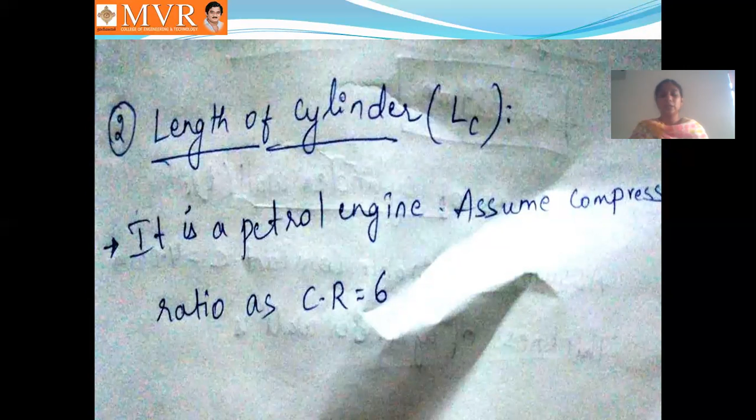Okay, next, second one, what should we find out? We should find out the length of cylinder. In the question they had given the petrol engine. Petrol engine means assume compression ratio as 6. Compression ratio is equal to swept volume plus clearance volume by clearance volume.

Swept volume we can take as the stroke, clearance volume as top clearance. Now compression ratio is equal to, we can take it as L plus L1 by L1. Substitute all the values, then L1 is equal to 32.6 mm. Okay, next, length of cylinder.

Length of cylinder Lc is equal to stroke plus top clearance plus piston length, that is L plus L1 plus Lp. Lp is nothing but piston length, we can take it as 1.25 into D. So 163 plus 32.6 plus 1.25 into 130. Substitute all the values, you will get the length of the cylinder.

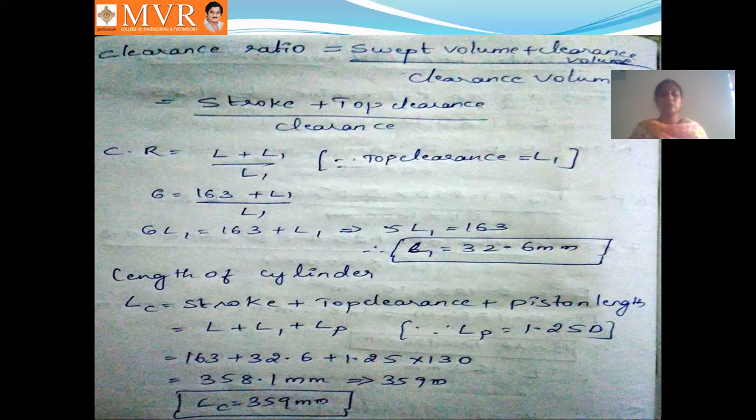Okay, next, thickness of cylinder wall, t. Assume constant C is equal to 4 mm. How will we find out the thickness? The formula is available in the data book, don't be confused. t is equal to Pmax into D by 2 sigma allowable stress plus C. Substitute all the values, you will get t is equal to 10 mm.

Okay, next, thickness of cylinder flange, tf. tf is equal to 1.3 into t, where t is the thickness of the cylinder wall, which is 10 mm. So tf is equal to 13 mm.

Next, thickness of cylinder head. The cylinder head is the topmost portion of the cylinder, and its thickness is termed th. th is equal to K D root of Pmax by sigma allowable, that is maximum pressure by allowable stress. K is taken as 0.35, D is 130, maximum pressure 3.2, allowable stress 40. Substitute all the values, you will get th is equal to 13 mm.

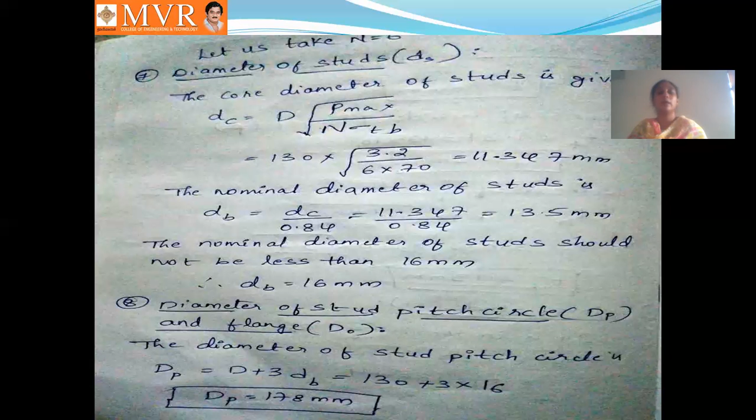Diameter of studs ds. The core diameter of studs also we can take it like this. Okay, the outside diameter of flange is D naught. D naught is equal to Dp plus 2 db plus 12. That is 178 plus 2 into 16 plus 12. We will get the D naught value.

Okay, pitch for studs. The pitch of stud PBO is equal to pi dp by n. It is nothing but pi into 178 by 6. PBO is equal to 93.2 mm. The minimum and maximum permissible values of PBO, that means minimum and maximum permissible values for bolts, they will be given.

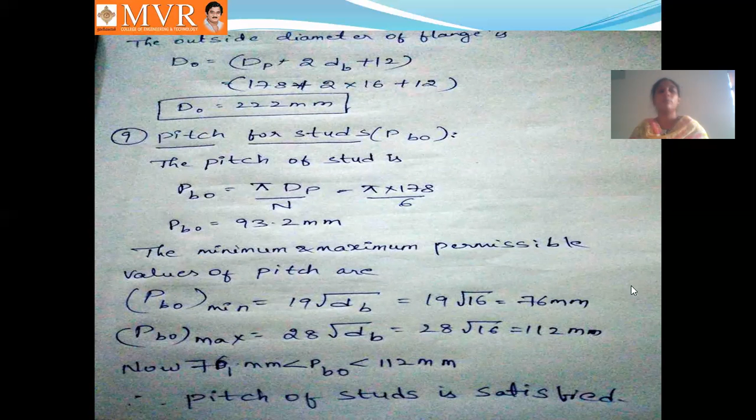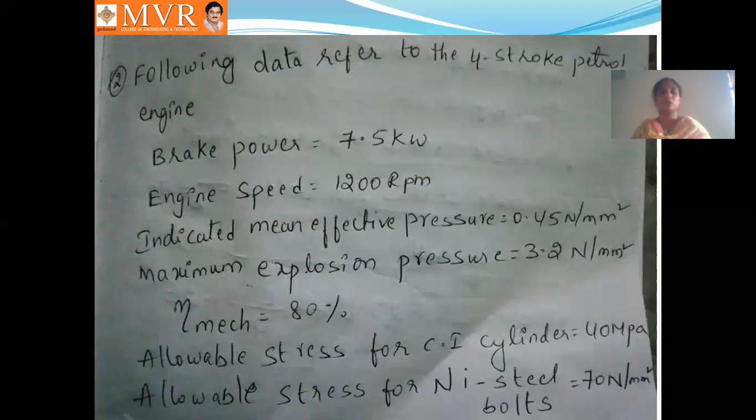Okay, this is the problem which we are discussing about the design of cylinder. In the last class also we discussed one more problem. Just practice these two models, you will get the cylinder. Don't be confused about the formulas which we are taking. Just keep the procedure correctly; the formulas will be in the data book only. That's why you purchase the data book or take it from your seniors, and keep it with you.

What is the procedure's next step? They will give it in the data book only. Just write the formula and substitute those values. It is very easy to solve the problems. This is the problem we are discussing about the design of cylinders. First we discussed the design of cylinders. In the next class we will discuss the piston, the piston length and design of the piston also. This is a very important topic, how we should design each and every part of an IC engine.

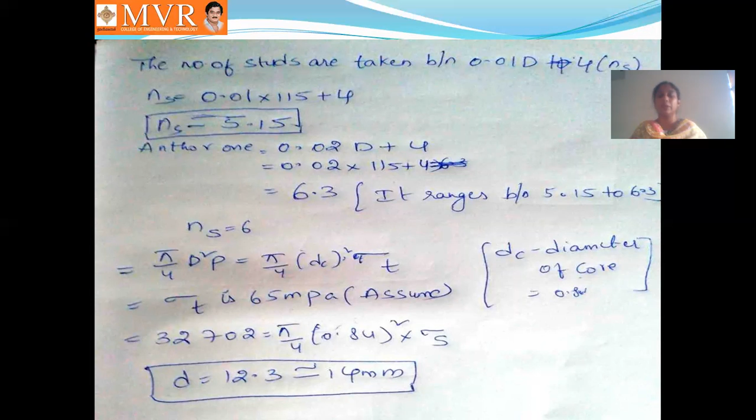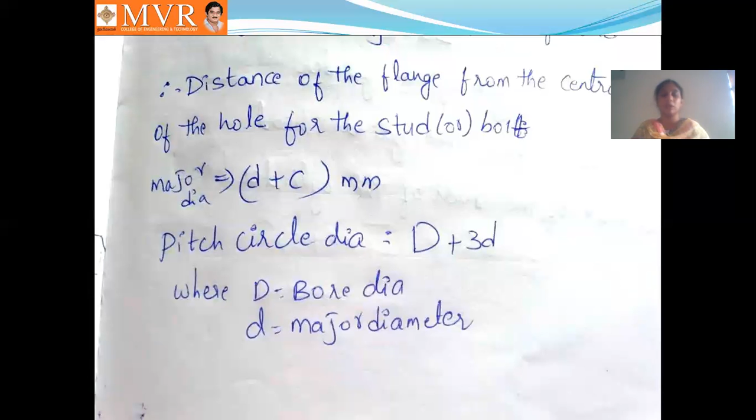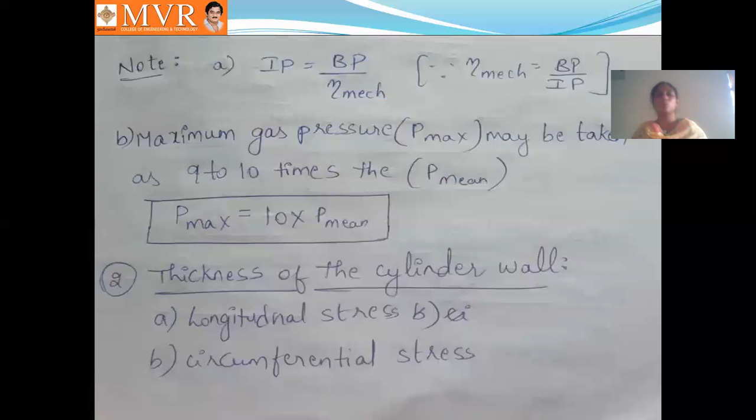How should we design, how much length we should take, how many bolts and studs we should take, a flange, what thickness we should take, all the design process they will give. We will see it in the design process. First you practice the design process, then you will get the problems easily. First you should practice the design of the cylinders. In the previous classes I told the design procedure of the cylinders. Like that you should practice step by step, and you will get the cylinder design process.

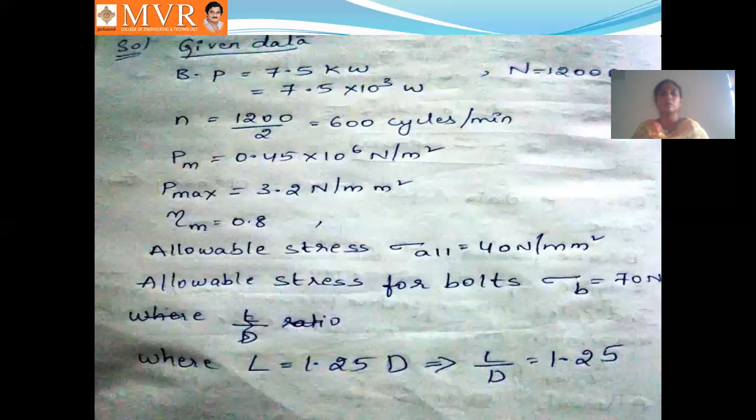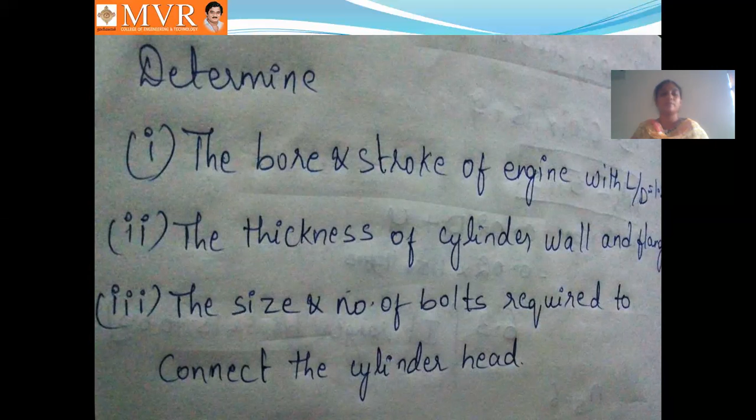In this problem, we should practice the cylinder bore. As we discussed, we should find out the bore and stroke of the engine, thickness of the cylinder, size and number of the bolts. In size and number of the bolts, we should calculate the pitch of studs and also the outer diameter of studs. We should find out like this.